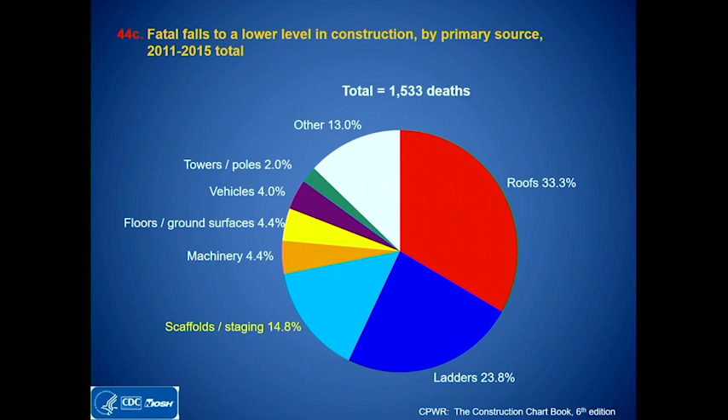First of all, let me use the CPWR chart book, 6th edition, which identified 1,500 deaths associated with scaffolds. And of those fatal falls identified, scaffold was number 3, under roofs and ladders. And that 15% of falls to a lower level fatal incidents actually is quite a bit. If you consider there are 800, 900 fatalities in the construction industry, that's many people's lives.

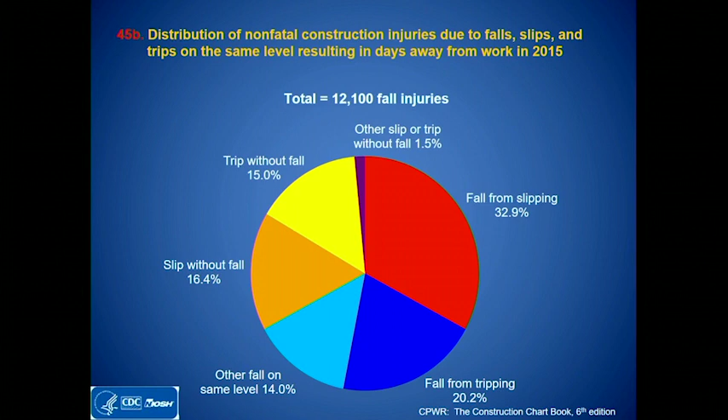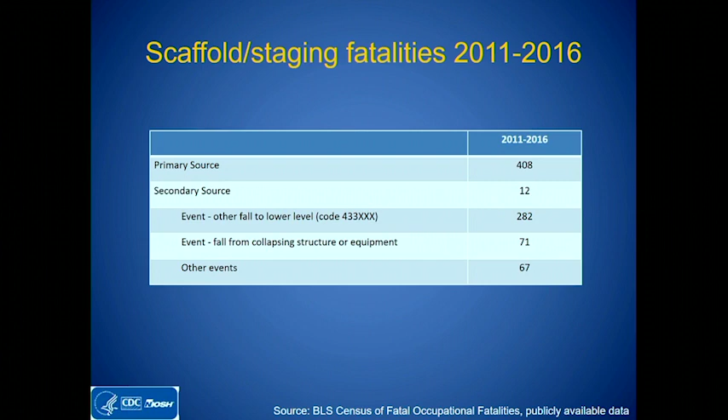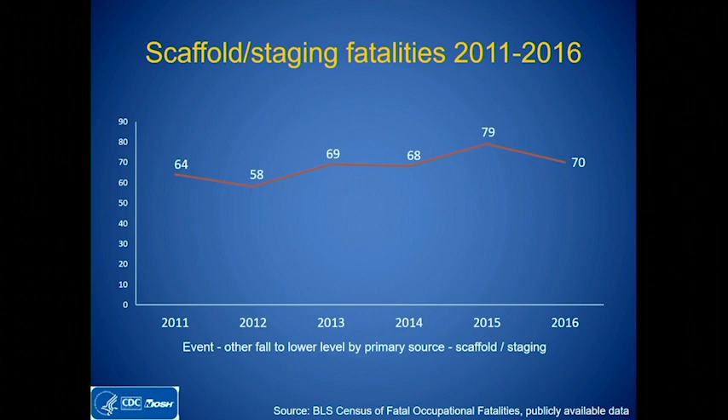And then we identified, this is something we did. We went to the BLS website and checked the CFOI data, called Census of Fatal Occupational Injuries. And we identified 420 cases associated with scaffolding. And we also identified each year, and we don't know why 2015 got so many, but then we go lower in that category to check the lower level by primary source scaffold. We identify this number for you to consider as a reference.

And then we categorize the scaffold fatalities by occupation, in different trades in construction. The reason I highlight in red is because they possibly use mast climbers, because I checked with all the trades, the leaders, and they actually use the mast climber. So I highlight them in red.

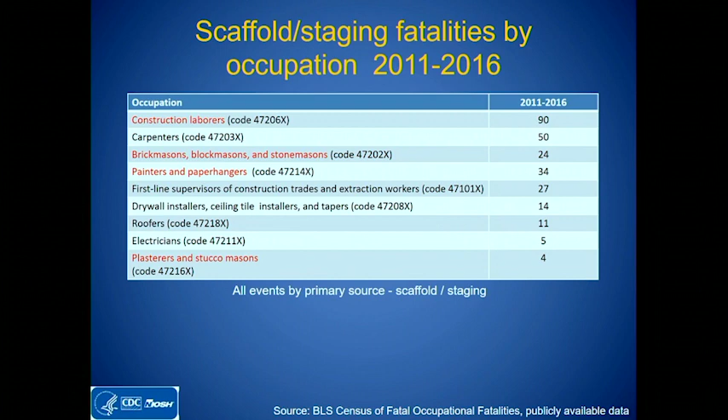And so you will see, it's difficult to identify mast climber incidents or fatalities, not because the number is too small. I think they have the tendency to categorize mast climbers into scaffolds in general, from OSHA or from other reporters. But I think this is the way to see how we can narrow our research focus.

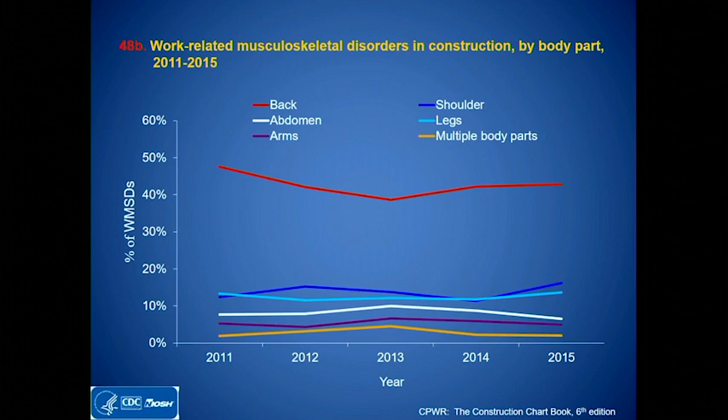And if we take a look at non-fatal injuries, especially for workers in 2015, we identified that in the construction industry, the back was the leading body part injured, other than upper extremity, including hand and shoulder. And from this figure from the chart book, you can clearly see that back injury for musculoskeletal disorders was basically equivalent to the combination of every other body part for construction workers.

This chart demonstrates where the masons are located. The masonry workers, for back injury, are pretty much in the middle. We call it moderate high severity.

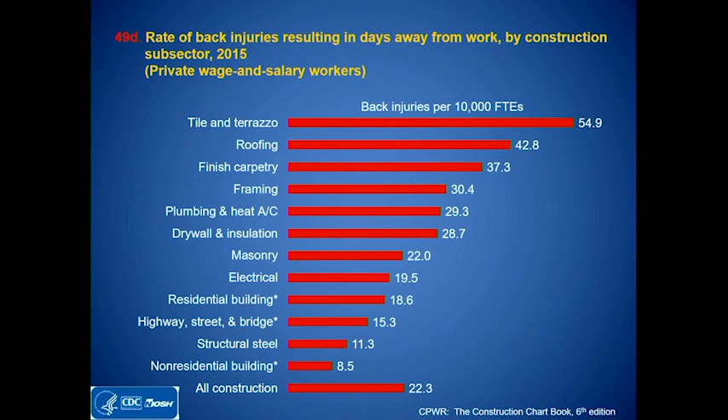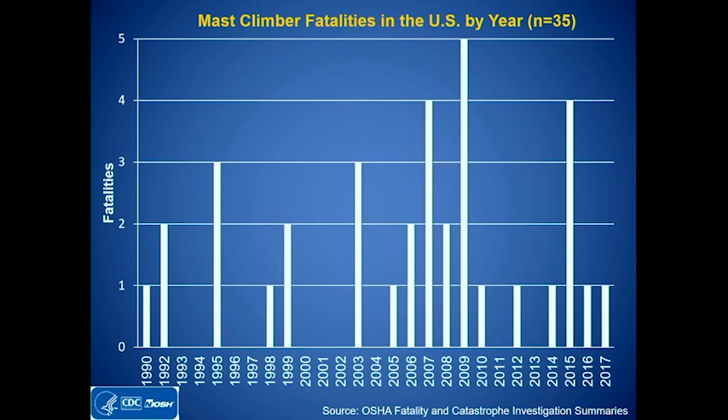And then we focus on the mast climber itself. We only identified 35 cases. Actually, in 2010, when I presented for the work group meeting with Jim, I remember we only presented 16, 17, 18 cases, but we updated this chart for you to reference.

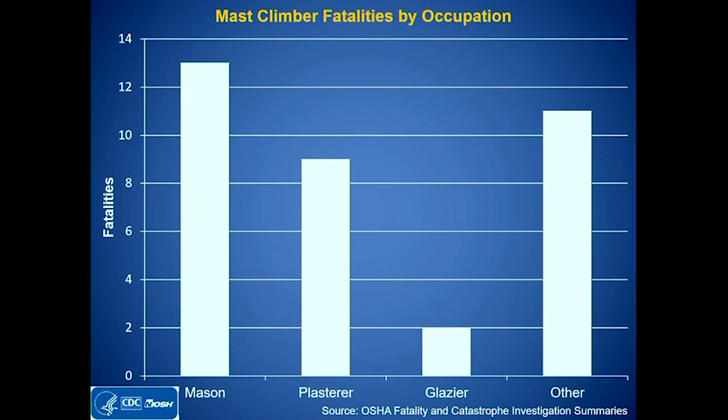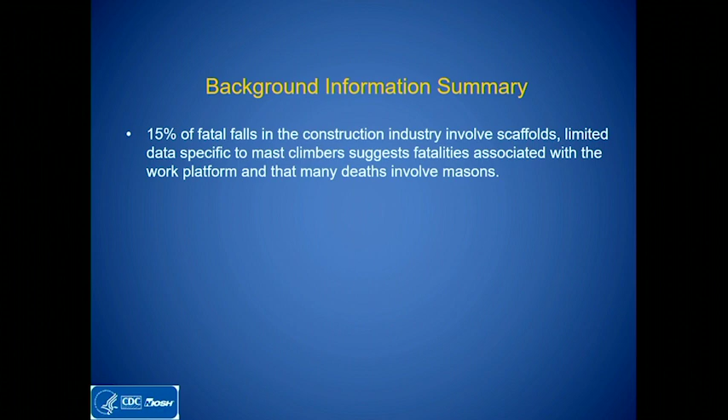And then I give you a summary of the surveillance findings I presented earlier. We basically identified 15% of fatal falls in the construction industry involve scaffolds. Of course, we only have limited data specific to mast climbers, suggesting that mast climbers actually cause some fatalities. And we also identified around 17% of back injuries in the construction industry involve scaffolds. And again, we don't have the data to specify mast climbers for masons.

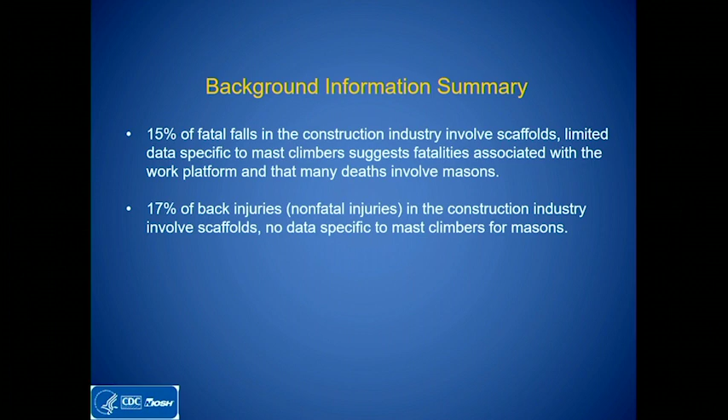We can be very sure that back injury accounts for almost half of work-related musculoskeletal disorders in the construction industry. We also feel that masonry workers are vulnerable, since they have a moderately high rate for back injury. That's our summary for the background information.

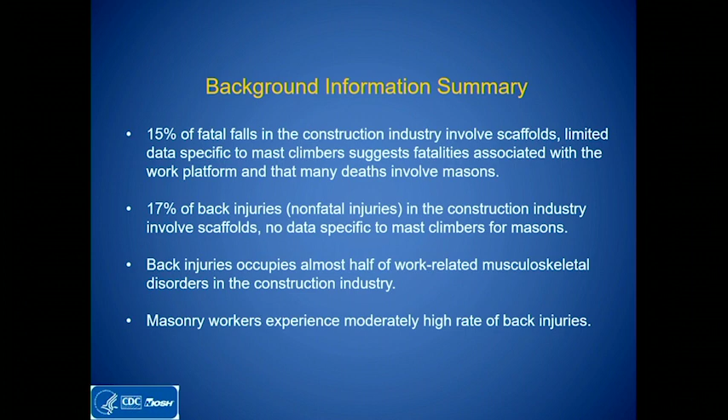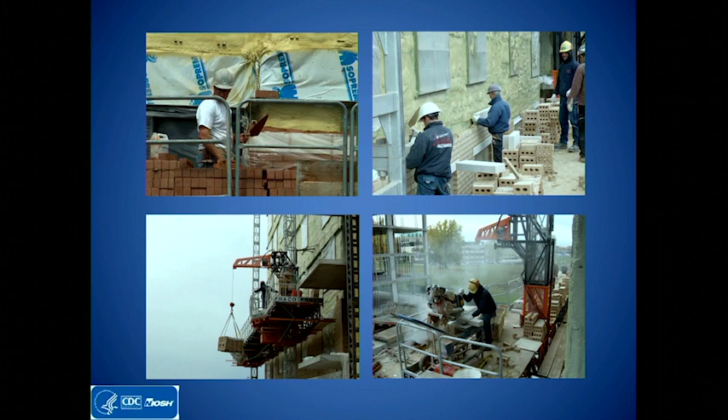And this is a picture. We're jointly working with Fraco, and Francois gave me this picture demonstrating mason work at a work site. It's not very strange for you to see that.

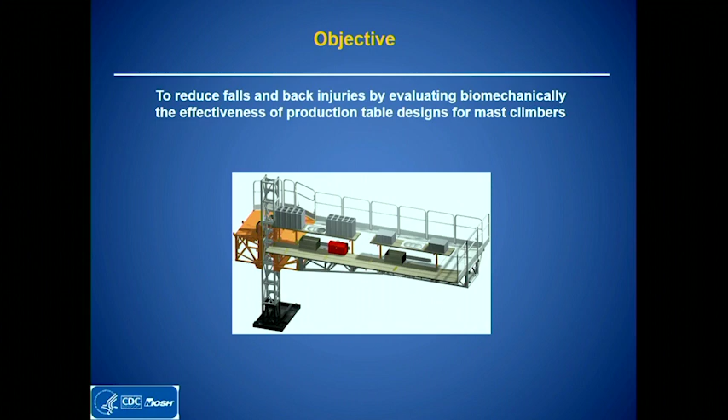This is our whole study's objective. We try to reduce fall injury and back injury by biomechanically evaluating the effectiveness of production table design for the mast climber. And this is one piece of work platform from Fraco.

We're using their one piece of work platform and put it in our lab, which is equipped with an 8-camera Vicon system. So we introduced the production table design from the manufacturers. We also have on the bottom one, and you'll see what we think could further reduce the back injury.

That's a very simple ergonomic design: move the material in front of the worker. We call it L-shape.

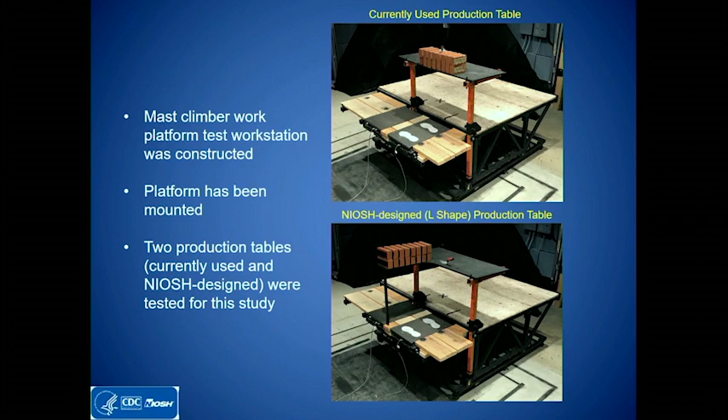The methodology is very heavy, so I'll try to use a very simple way to say it. We basically use 14 mason workers. We actually already collected 18 masonry workers, but before I could conclude analysis on all 18 human subjects, I could only analyze 14 before the deadline for this presentation.

We built up a workstation, a simulated workstation, to simulate not only the working posture for that specific equipment but also the elevated height. I think that's one of the first in the nation to conduct this type of simulation test for construction workers.

We used the one piece of work platform from ACTA, from Fraco, and we tried to design a very similar suspension system as you elevate the equipment for the workers.

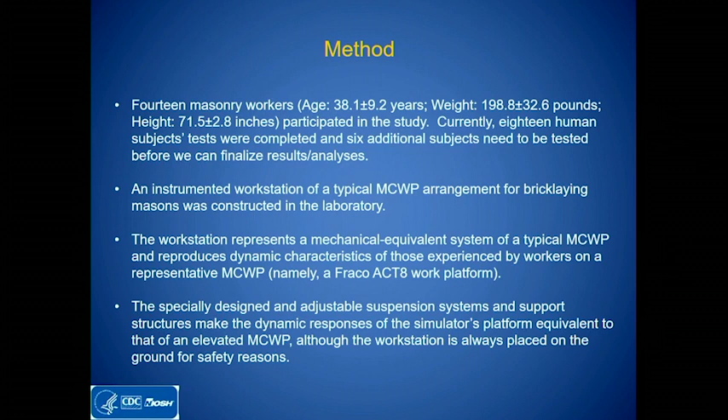Again, the methodology here is a little bit heavy, so I'm going to present it in a very simple way. We basically control something called the independent variable, which we don't change: the table. For table, we have 3 categories: no table, production table, and L-shaped table.

For the task, we identified 3 tasks most likely to cause back injury or fall injury as potential candidates. They include the bricklaying task, stepping down task, and walking task.

The damping factor simulates the unstable condition when the worker is working at height, which we compare with the rigid condition on the ground, with no damping factors. That's what we controlled in this well-controlled laboratory study.

What we measured: we measured the trunk postures, we measured the stepping down forces, we also measured postural sway variables including sway length, sway area, and other kinematic information — that means motion, including velocity and acceleration.

And again, I'm not going to specify the gait.

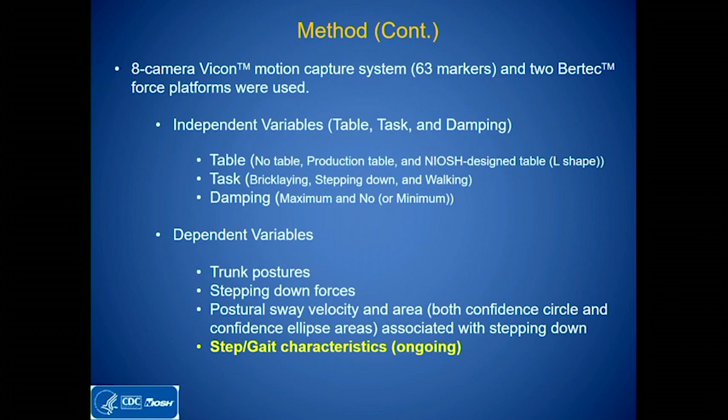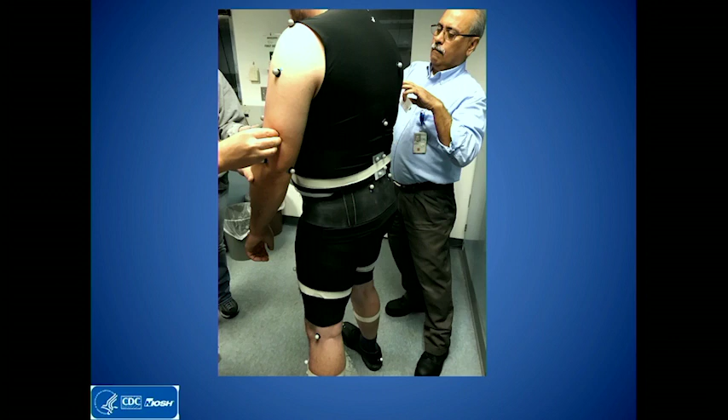The first picture is one of our team members, and the second picture is a real professional mason. As you can see, we put markers on them — I'll demonstrate how we did that.

I know movie makers in Hollywood use this type of marker and motion system to make movies. But what we're actually doing here is using that for quantitative evaluation, using that kind of technology to scientifically evaluate posture and force, which means the results we generate can be publishable.

And this is the test. We demonstrate how a professional mason performs the test in our lab.

As I mentioned earlier, we simulate the elevated condition using the spring damper we collected in the Pittsburgh area, using the Fraco ACT8 machine to calculate the stiffness of the spring damper. So we measured that.

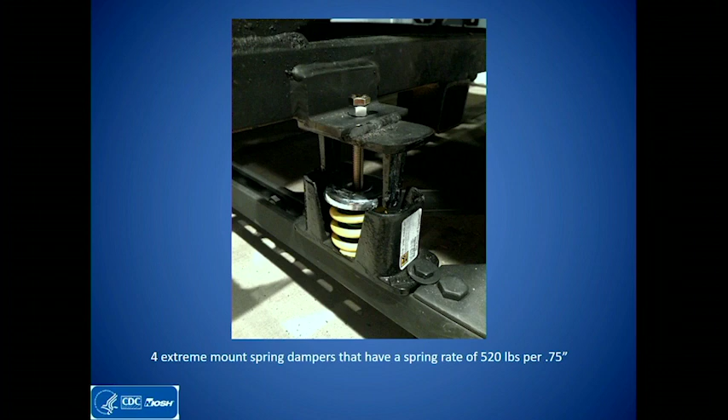This is spring dampers. I want to demonstrate this. We did that with either no damping, which means we used a screw basically stuck on there, so that means it's going to be a rigid condition. But once we take out the screw, the spring damper will show the unstable condition for the workers conducting a similar test in our lab.

This is the L-shape test for the bricklaying test. I'm going to demonstrate some motion tests. Each bricklaying test occupies 2.5 minutes, sometimes less, so I'm going to show you four separate clips demonstrating how the workers simulate this test in our lab. We use Velcro instead of concrete to avoid messing up our equipment.

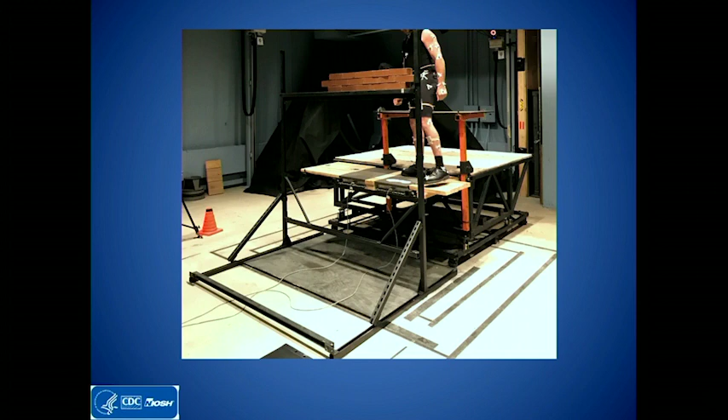So this is three video clips for the bricklaying test, and this is the final stage. The workers finish the bricklaying test with 16 bricks. This picture demonstrates how the workers finish the test, and left, the force plate collected force data. This test demonstrates the workers performing the stepping down test.

We identified this test based on 18 previous fatality reports from OSHA, and I found out many tests are actually associated with this type of incident. So we use a stepping down test.

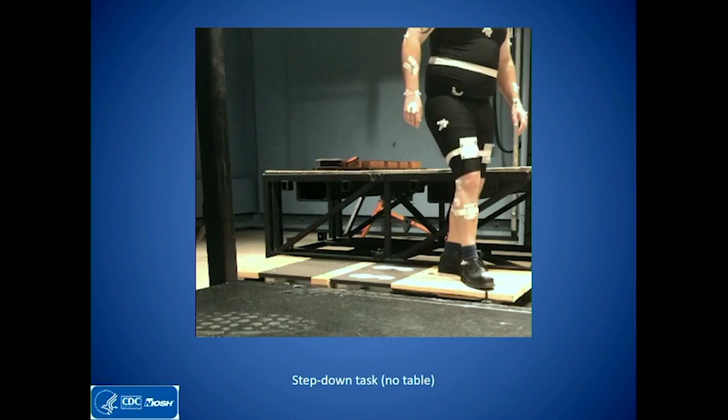Let me demonstrate one more time. You can see the worker actually needs to use his muscle, vision, vestibular system, and central nervous system to balance themselves in order to reduce that forward momentum to get out of the plank when performing the task.

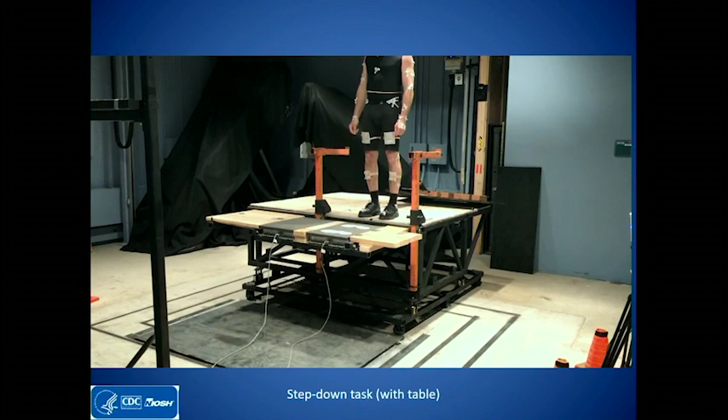We feel that test is very seriously hazardous, and I can talk about it, but you need to see it. Once we implement the production table, the worker can actually step forward very easily without that kind of unbalanced condition. And this is only from the pictures and video.

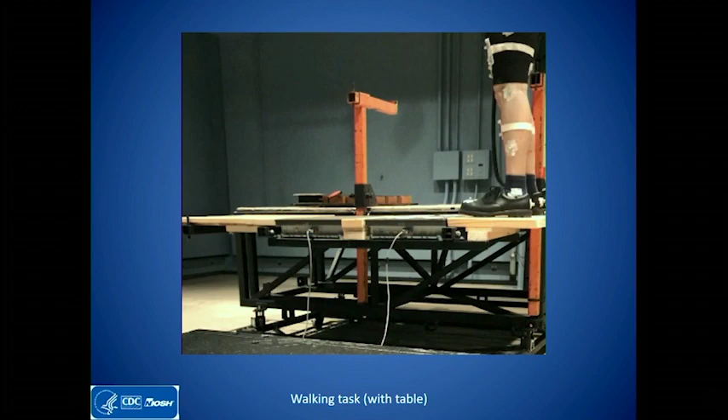I will show you the data we collected. This is the test where we actually collect the regular gait, the walking pattern. We have a hypothesis that when workers perform tasks in the elevated condition, they will change or modify their walking pattern during the work or task they are conducting in the elevated condition.

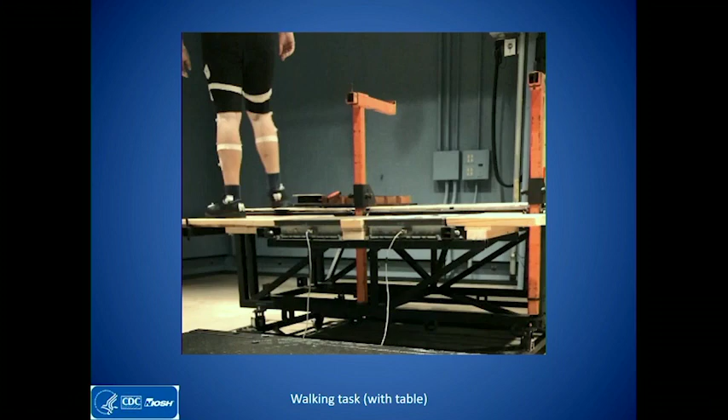You can see we collect this data from the workers. Actually, from our monitor, we only collect this; those pictures I showed you demonstrating are from my iPhone.

We call it inverse dynamics, used to calculate each joint stress, but that's not our focus at this moment. Now I'll give you a summary of our methodology. I'm going to read it for you, so I'm not going to skip anything.

We're going to create a similar laboratory setup and reasonably mimic the real-life work, in this case the masonry work and the Mast climber. We try to complete and assess whether the production table minimizes risk for fall to a lower level, slip and fall injury on the same level, and back injury.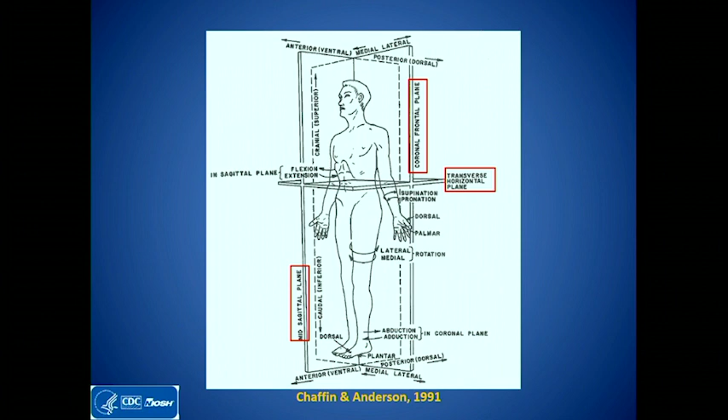In the frontal plane, basically the lateral direction, the sagittal plane, basically front or back, and the transverse plane, which basically evaluates rotation. These three planes are very basic biomechanical knowledge in my peer society, but I'm going to demonstrate them so I can easily show you the result.

Our preliminary result for the stepping down task and the kinetic measurement, which is force: you all know that for most traumatic injury, especially falls, the most critical part is the highest force, especially shear force, horizontally. That's the reason we only picked the peak shear force in the x direction, and we identified very significantly that using the production table reduces that shear force.

As I mentioned, the video demonstrates the workers so easily moving from the platform to the plank, relaxed, without using any muscle to balance themselves.

But using that without the production table, your experience is that, if you do that - I did that several times - you have to use your body muscle, vision, or vestibular system to balance yourself.

Our results demonstrate what we expected to meet our hypothesis: the shear force for X, which we call the frontal plane sway force, or medial lateral force, is something the production table implements. Once you implement the production table, the shear force is significantly reduced, which means your slip and fall or fall to a lower level is actually reduced.

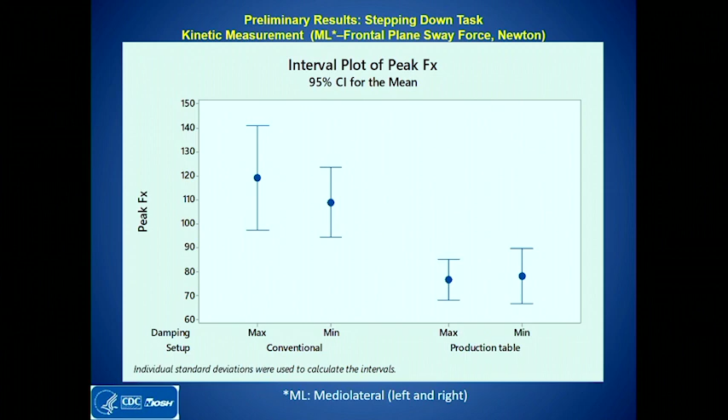This, of course, is our preliminary result. The FY showed the same thing - I'm not going to repeat it. The vertical force showed the same thing as well.

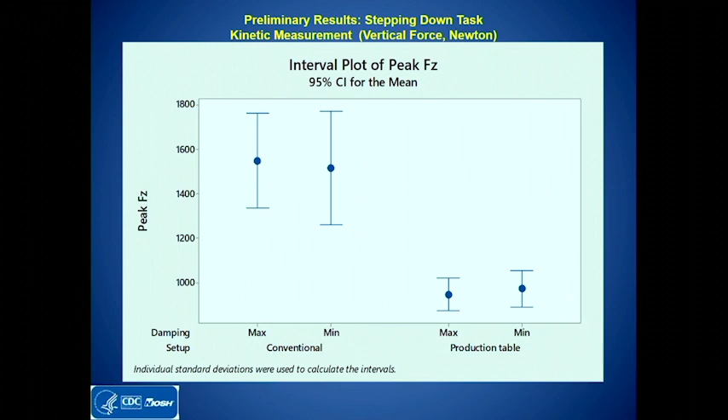From a biomechanical standpoint, we not only evaluated the force, we also measured the motion. For the kinematic measurement, it's exactly the same as we originally expected. We used total sway length over the duration of that specific task, and we identified the sway velocity to evaluate the production table's effectiveness, demonstrating the exact same result. The same thing applies for the damping factor, which significantly affects the no-production-table condition.

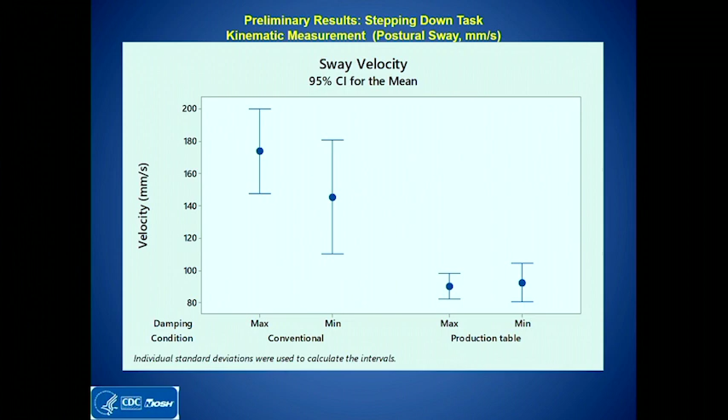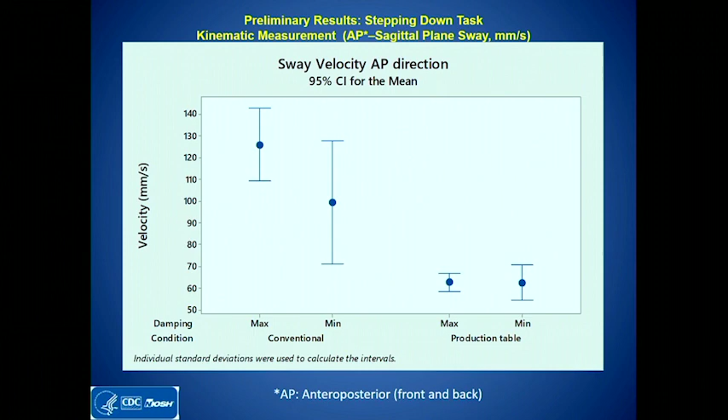So it's the same thing for the left and right direction, and front and back direction. And I think this is something important for us.

We actually analyzed the sway area. I'm not going to go into detail because we need this for publishable material. We analyzed sway area based on the confidence ellipse area, and I feel this just fits our publication requirements. But the result identifies the exact same direction as our original hypothesis.

The production table is going to reduce the worker's postural sway. From this sway area, we evidently prove that, and the confidence ellipse area shows the same thing.

Then we talk about back injury. I know the Mason - I work with Mason, the union laborers, and the employer too - and they support these projects because I feel their main focus is trying to reduce back injury. That's the reason I feel the original evaluation for Mast Climber came to be a project and got funded.

Originally it's about fall to the lower level, but I do know that from the Mason employer and employee standpoint, they were plagued by back injury because they have so many repetitive motions associated with their regular, daily tasks.

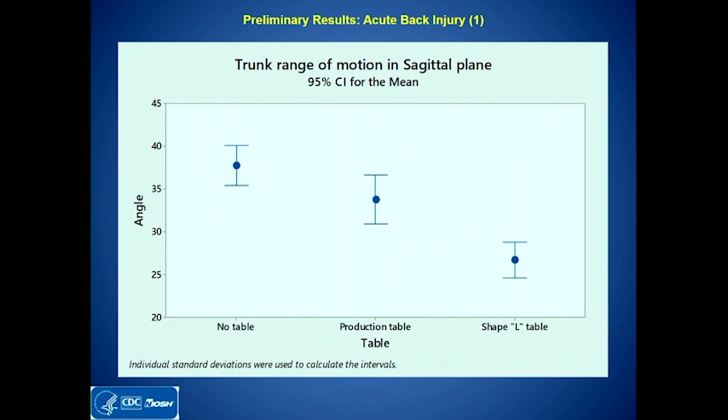That's what we can basically say - even though it's a preliminary result, it's statistically significant. Both the production table and L-shaped table demonstrate that, from the sagittal plane, frontal plane, and transverse plane.

I'm not going to present this in detail, but I want to tell you we already collected data and analyzed some of it. We will emphasize the specific spot called the pelvis and trunk, called the deviation. Workers, especially Masons, change their walking pattern when they perform their task at the Mast Climber - that's our hypothesis.

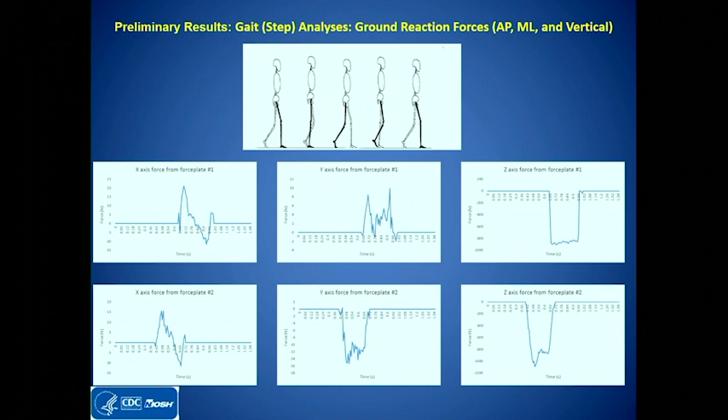So what's the take-home message? I think what we're trying to present is the production table. From the first presentation I heard from Francois and Kevin, I really felt this could be a great intervention, and we proved it's going to be very effective.

The effectiveness is so high, it not only reduces postural sway hazard, it also reduces back injury, which can sell this idea to Mast much easier.

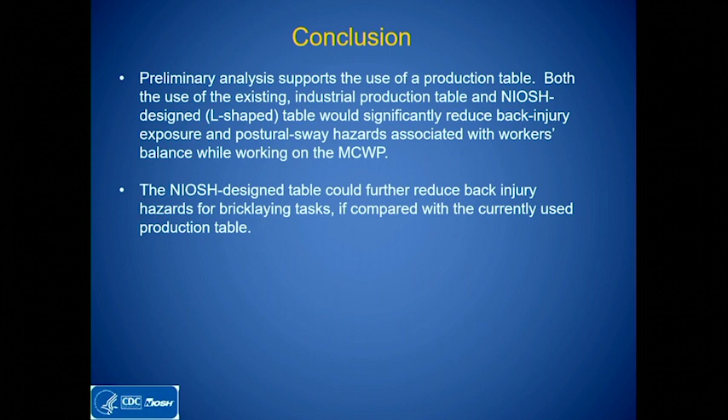We also feel the L-shape can further reduce back injury, but I got some comments from the trade about how to reduce that kind of access obstacle within the plank. I discussed this with Francois.

We have some other ideas to address that. And the damping factor is something - once we implement the production table, we actually reduce the elevated unstable condition for the workers.

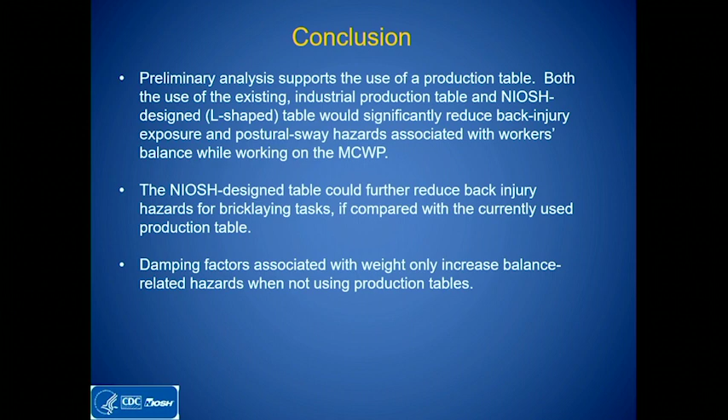Now I'm going to talk about what we're going to do in the future. We're going to collect an additional 6 human subjects in our lab, and we'll submit the abstract to a scientific conference called the NIOSH conference. We will conduct detailed biomechanical data analysis and publish results - one of NIOSH's missions is to publish results for the peer society. And we will continue to develop a computer model, which I'm going to introduce you to later on.

And we will have another piece of our study, the physical test. Based on our review of those 18 fatality cases from 92 to 2009, we found out the anchor, especially dismantling, could be an issue. So we're going to evaluate that using the Fraco equipment in our facility at Bruceton, PA, to conduct that test and complete our study.

And then we're going to develop a computer simulator using the Unity 3D engine. And in this part, I have to acknowledge SAIA. I remember Dave Merrifield worked with me since 2015 and tried to help us disseminate our scissor lift model. And we actually are going to use the same methodology.

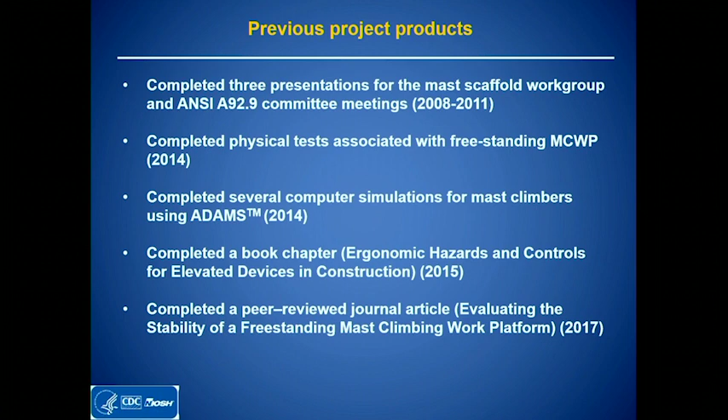Then Brian published a peer-reviewed article in the Journal of Safety Research. I think he brought that article to you last year in Montreal. And this is the book chapter, as I mentioned. In this book chapter, not only the mast climber is described, but also aerial work platforms, stilts, and regular scaffolds. We did that over the last 15, 20 years. And this is the article we published in the Journal of Safety Research regarding freestanding mast climbers.

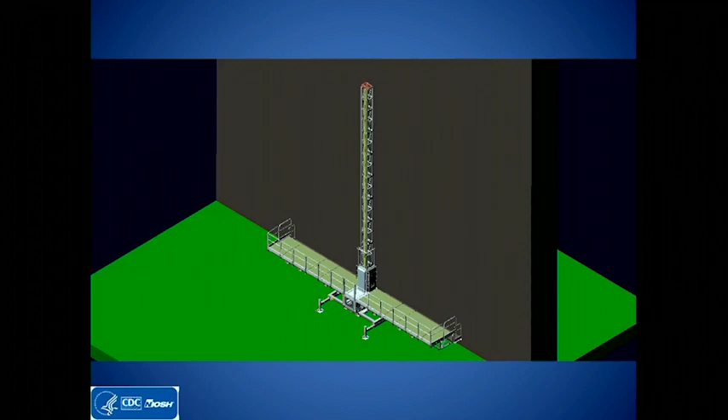And this is the simulation file. It's a very preliminary result we produced for safety reasons before conducting the physical test at Bruceton, PA, because we want to make sure the tests we are doing are not going to cause any investigator injury. This is a quantitative simulation, not a qualitative one like animation. So all the information there is quantitatively sound. We used the information from Fraco and imported it into ADAMS to make this simulation.

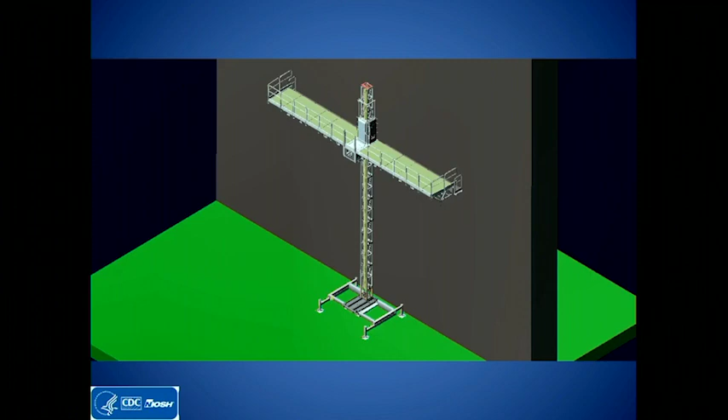Once this preliminary model was built, we can simulate different scenarios, such as if you dismantle inappropriately, what the consequences are for worker injury or equipment collapse. And this is another case. We simulated a case we observed from those 18 reports, but it's not quantitatively set up because we don't have detailed data in those investigation reports. I'm talking about workers' distance from the mast, for example, and information about the obstacle.

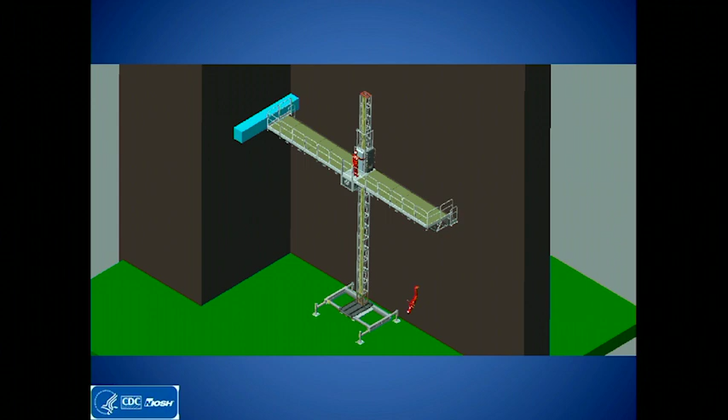So we just simulated that as an example of what we can do at NIOSH if we have quantitative, accurate information, and what kind of results we can generate.